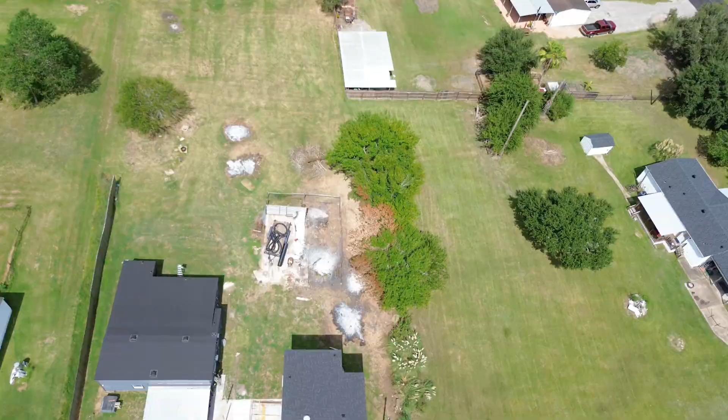If you have a backyard, chances are there's at least one corner that you've thought about turning into something useful. For me, it was this spot right here. Instead of letting it sit empty, I decided to build a chicken coop. But before building anything, I first designed the entire framing in SketchUp so I could see exactly how everything would come together.

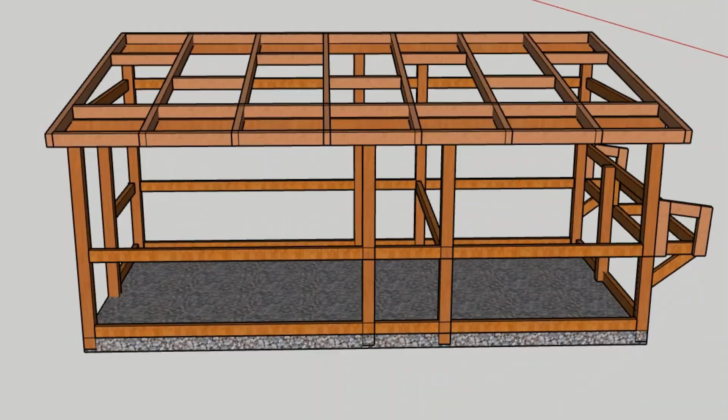In this video, I'm going to walk you through the framing design for this 16-foot by 8-foot chicken coop step by step. The front wall is 6 feet tall and the back wall is 7 feet 2 inches, which creates a natural slope for the roof so rainwater can easily run off. This design is simple, sturdy, and beginner-friendly, which makes it perfect if you're planning to raise chickens in your backyard.

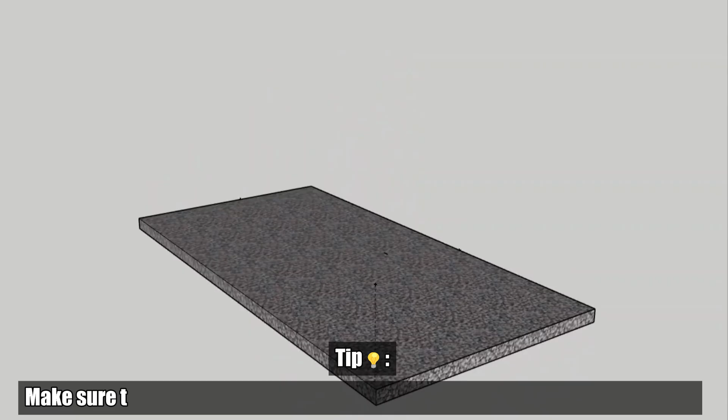Now, let's walk through the detailed step-by-step framing plan for this chicken coop. Start by preparing a flat, level area where the coop will sit. The foundation should measure 16 feet by 8 feet. For better drainage and durability, you can use gravel, concrete blocks, or deck footings. Tip: make sure the base is level before framing. This prevents twisted walls later.

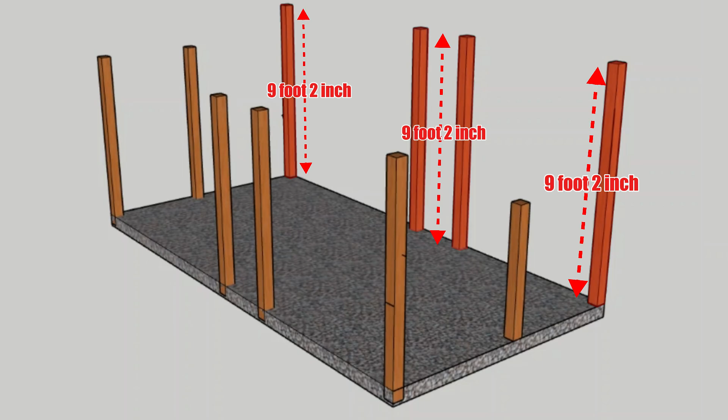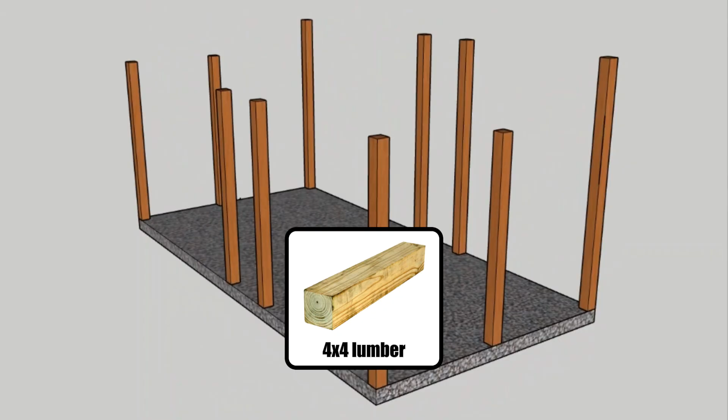Next, install five 8-foot 4x4 posts, one 3-foot 8.7-inch 4x4 post, and four 9-foot 2-inch 4x4 posts, ensuring that 2 feet of each post is embedded into the foundation to provide stability and prevent the structure from shifting or tipping. The difference in height creates a slight slope, allowing rainwater to drain properly. We're building the base frame using 4x4 lumber to create a strong foundation for the coop.

Now let's go over the spacing between the posts. For the 8-foot posts, from the first to the 6th post measures 3 feet 6 inches. From the first post to the second post is 6 feet. From the second to the third post is 1 foot 10 inches. From the third to the fourth post is 8 feet 2 inches. From the fourth to the fifth post is 3 feet.

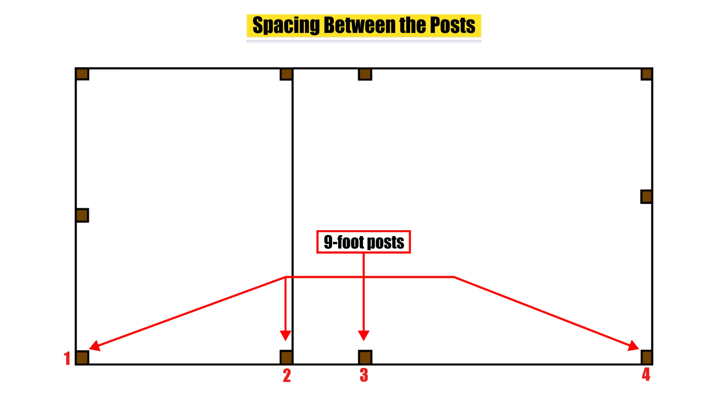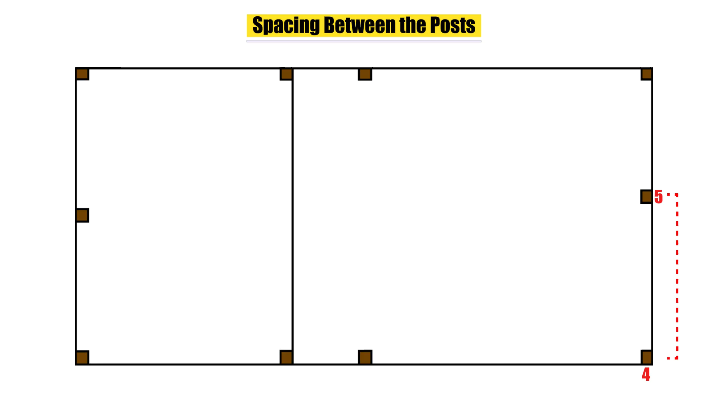Now for the 9-foot posts. From the first 9-foot post to the 8-foot post is 4 feet 2 inches. From the first to the second 9-foot post is 6 feet. From the second to the third post is 1 foot 10 inches. From the third to the fourth post is 8 feet 2 inches. And from the fourth 9-foot post to the fifth 8-foot post is 4 feet. This elevated section will serve as the main chicken house, raised from the foundation.

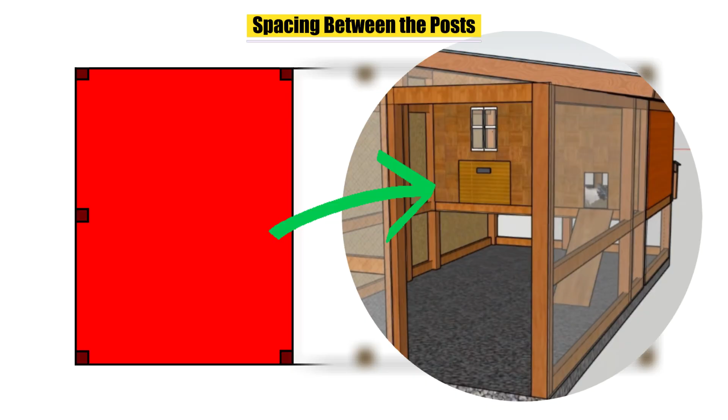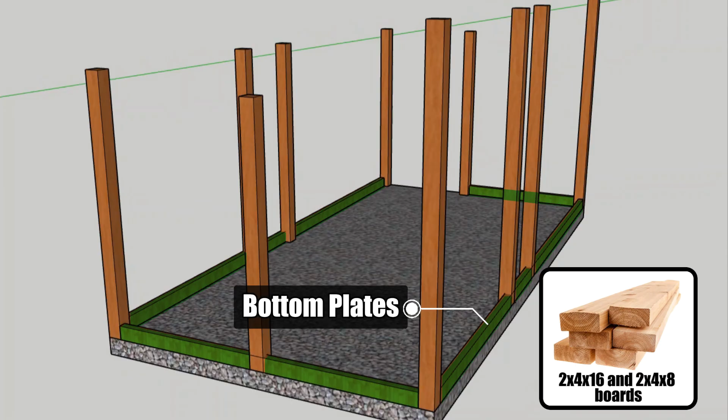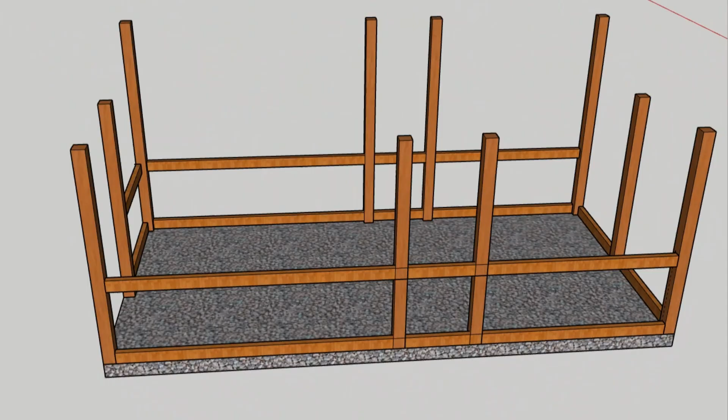Next, connect the bottom plates. Install the bottom plates using 2x4 by 16 and 2x4 by 8 boards. These plates connect the vertical posts and form the base of the wall framing. Now add the horizontal wall studs. Cut two 2x4 by 16 boards and one 2x4 by 8 board. Install them 1 foot 10 inches above the bottom plates.

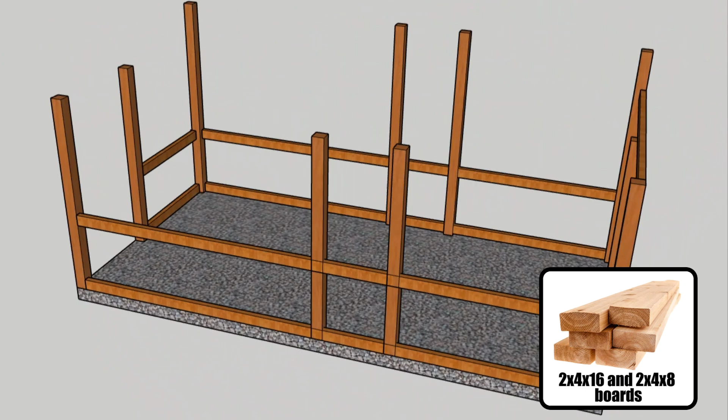Now install the top plates. Prepare two 2x4 by 16 boards and two 2x4 by 8 boards. Install them along the top perimeter of the frame. The top plates tie the entire structure together. They also provide support for the roof framing.

At this point, the coop framing should look like a strong skeleton. In the next part of this build, I'll be working on the roof framing and showing how everything comes together.